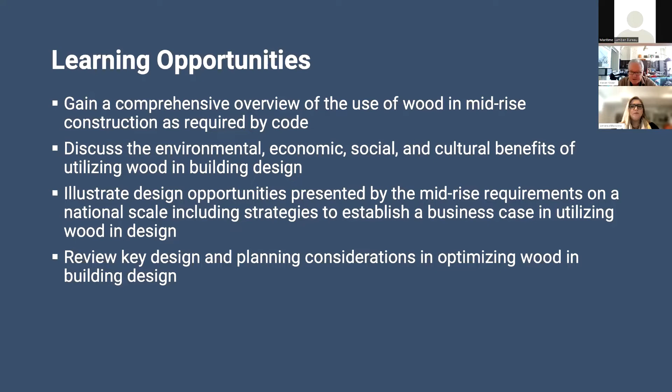So big question, why the mid-rise guide? The ensuing publication, which we drew all the research from, was really to concentrate on the code opportunities that the provisions across the country had left us with. It's been active for at least 12 years. The first province to adopt 6-story wood construction was British Columbia. And each of the provinces across the country were at different acceptances and understanding of what those code provisions gave us.

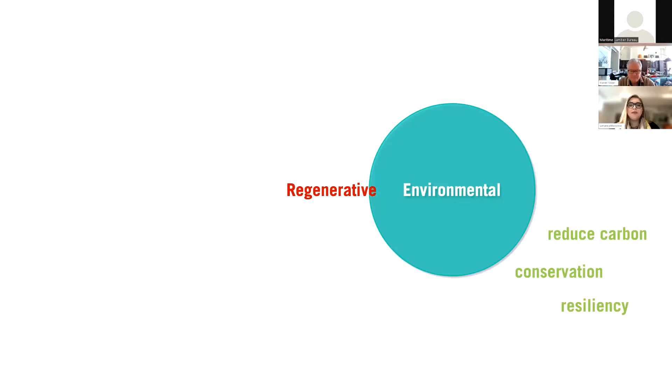So our strategies for building design over the coming years will have a critical impact on whether we can achieve climate stability, whether we can form stronger communities, and whether we can move towards an architecture that positively impacts our cultures and our social networks to create healthy and thriving communities. As we know, buildings have multifaceted impacts on the environmental, social, economic, and cultural systems. Thinking about mass timber and prefabricated systems, there are many opportunities that impact each of these four sectors.

We can consider resiliency and conservation in our buildings by reducing carbon. We can provide healthier communities that are dignified and equitable, but we can also develop new skills and employment opportunities and foster new industries to all really support thriving communities.

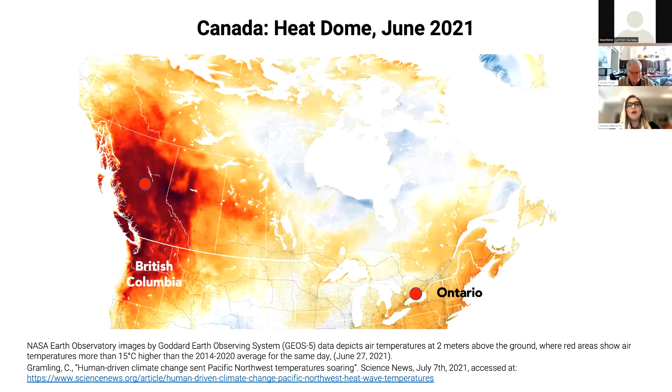So we come back to the environmental impacts, because I think this is where the increased use of mass timber and prefabricated systems can really have a great impact. And so, like many places around the world, Canada is seeing the direct impact of climate change. This is an image of the NASA Earth Observatory taken June of 2021, when British Columbia had this heat dome that covered the province, and it resulted in record-breaking temperatures and significant forest fires that summer.

And the impacts of climate change are presenting significant economic strain on our systems as a whole. The fires in British Columbia in 2021 resulted in over $881 million of damages and impacted over 4,000 homes. Months later, the extreme rainfall and flooding that was caused in British Columbia, mostly because of the soil that was unstable because of the forest fires, resulted in over 15,000 people having to evacuate their homes. And it impacted critical food sources, resulting in over $450 million of insured damages. And we saw weeks later that the maritime provinces also had extreme rainfall that same year.

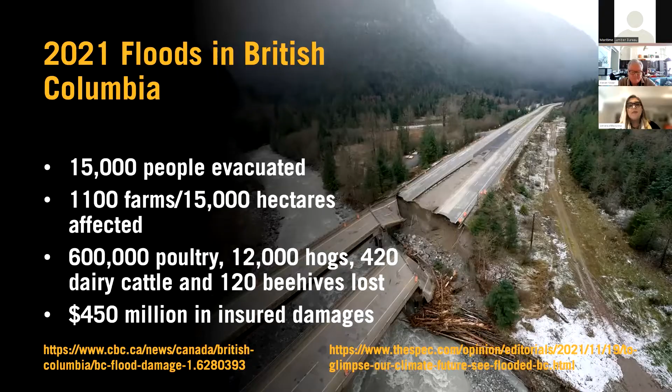Now, climate change is impacting our ecological systems as well, which is linked to the decline of biodiversity and pollinator animals. Biodiversity is critical in safeguarding global food security and underpinning healthy and nutritious diets in communities, and also improving rural livelihoods and resiliency of people and communities. A dramatic die-off of pollinator animals, which climate change is one of the key factors in, could result in the loss of essential crops of over $500 billion a year. So the economic impact of climate change, along with the social and cultural impacts, are great, and we must really be considering differences in how we proceed forward.

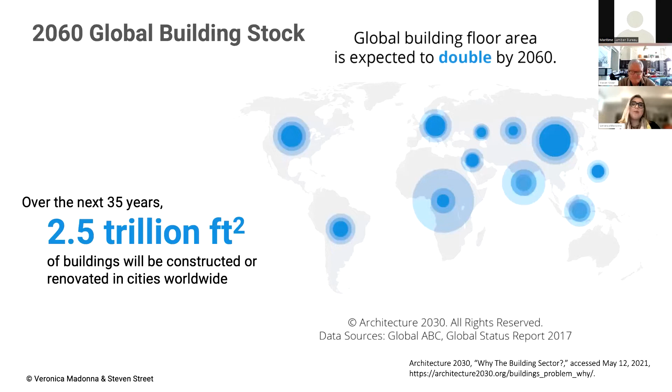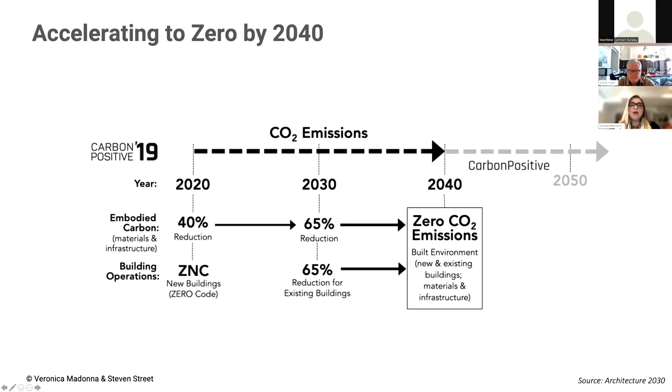We're seeing this in our own cities and towns in Canada as well. The Toronto City Council has just passed regulations to change its 2050 targets to 2040. By 2030, there's an urgency to develop net zero carbon standards. And also, you can see here from this chart the stepped system, where it's saying that new buildings should achieve net zero carbon as of today in terms of operation, and a 40% reduction in embodied carbon. And this is where mass timber can play a significant role. And by 2040, we are zero on every aspect, including existing buildings.

Now, an emerging area of study is embodied carbon and its impact, because embodied carbon locks carbon into place as soon as the building is built. There's no way to really improve that condition once the building is built. And that's why materials become a significant component of that. This was a study that I undertook with some colleagues at Athabasca University, where we studied the impact of carbon on both a code compliant building and a net zero carbon building. So we did a typical 5-story mid-rise office building, and we ran metrics for a code compliant one, thinking about operational and embodied carbon, and also one net zero.

What was interesting about the summaries that we concluded was that by simply changing certain things, like the way that we looked at our operational systems, and moving towards more passive design systems, we were able to reduce 48% of the operational carbon. Now, by simply switching the concrete reinforced structure, which you see typically in these types of buildings, to a mass timber structure, we were able to receive an 83% savings on embodied carbon. To me, that's very significant, because simple moves in considering our materials, and in particular our structural systems, can have significant impact on embodied carbon.

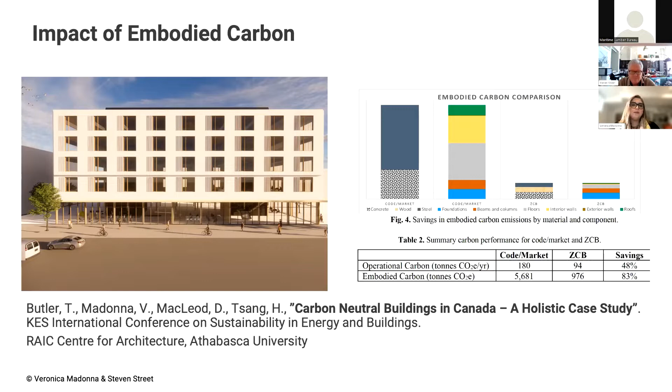As well, many planning and urban strategists are speaking of the importance of the missing middle. This is the community-driven, mixed use, mid-rise buildings that encourage livable and thriving cities.

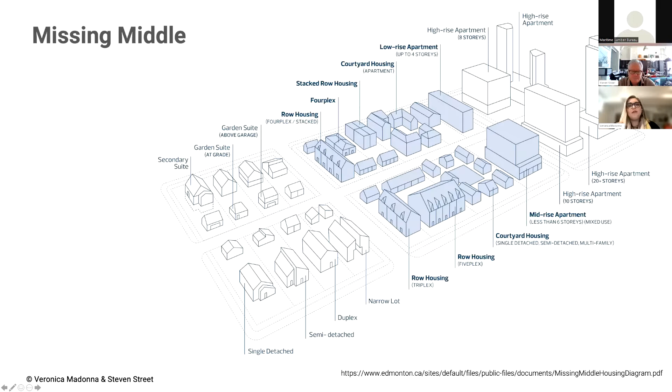At the same time, Canada, as many parts around the world, is faced with a housing crisis. Almost one-third of Canadian households live in inadequate, unaffordable, or unsuitable housing. Most vulnerable are women, youth, and visible minorities, as well as Indigenous communities. So the opportunities for mass timber and prefabrication to bring healthy, equitable, and durable housing into these communities is great, and we must look towards those systems as well.

There are strategic plans across the country really looking towards developing northern communities, as well as densifying existing main streets. This is something Steven talked a lot about when we were starting off the guide: the potential of mass timber to build on top of existing 2- to 3-story buildings, which we see across many towns across the country. The reason this becomes very fruitful is that mass timber is a very light system that could easily be placed on top and have minimal impact on existing buildings, not only keeping the existing housing stock, which reduces embodied carbon in itself, but also preserving the heritage of our cities and towns.

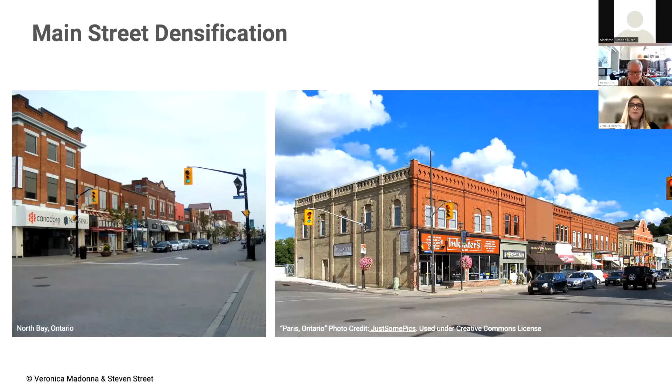It was just-in-time delivered. Once the foundation work was in place, it was craned in with a mobile crane from the rear laneway and erected up to the frontage. They started from the front of the building to the back, but it's a positive impact on the street — it stays within an allowable height and also has less impact.

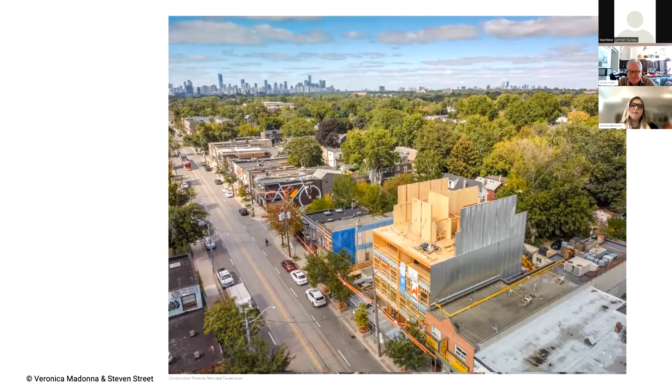Going to Sweden and seeing Canadian products being used in an application we can't actually do here was quite ironic. But the idea was these buildings were a mix of incomes — affordable housing units as well as privately owned. It's just something to think about, how planners can create these great little nodes of community.

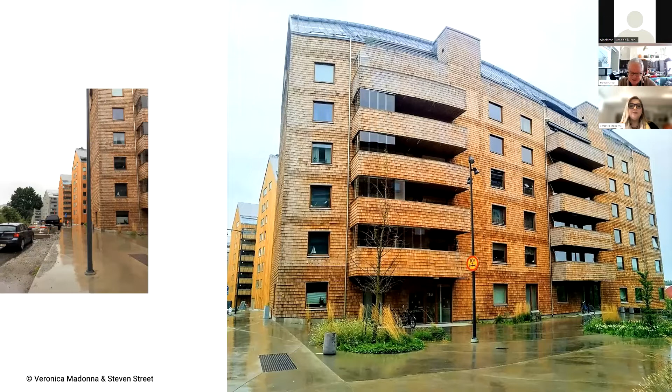Some more illustrations of what the Swedes have done very well: they took a brownfield part of Stockholm around the seaport district and went into this on a big scale. They wanted to get families back into the city centre, and you do that by encouraging really good, healthy, quality housing. What I liked as well was that on the flip side of the buildings there were community gardens and allotments where people were encouraged to grow their own food, and also on the street side of the development they had lovely gardens which people were encouraged to sit in 12 months a year.

They play hockey and ball and everything that we do here, with very narrow streets. They wanted to discourage as much street parking and automobile use as they possibly could, so they had a very narrow street, just 2 lanes. I remember the comment from the Canadian delegation I was with, that they'd never get their fire trucks down here in Canada.

The architect and planners taking us around the development looked at us and said, well, just tell them to get smaller fire trucks, which I thought was quite a comment. It's actually stuck in my brain ever since.

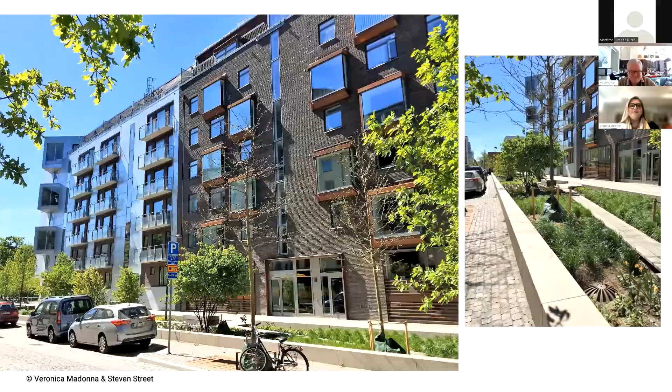So we're going to take you back to where the work started for Veronica and I when we got the privilege of doing this guide, about how project planning can be used to optimize the design of these buildings using the code opportunities.

I call this Veronica's brain, with Steven pushing and prodding. It turns out we're both big post-it note fans, our walls are covered in them, but this was a really good way of unlocking how an architect starts to think and needs to think about working with their clients to get the kind of building which they see as their vision, and an architect can help them achieve.

So it goes through some of the pre-planning considerations, understanding the code provisions. The key part of this is, how am I going to do this with the structure? Is it going to be an all wood structure? Is there going to be a hybrid structure? Is it going to be a podium, etc.? And some of the site-specific considerations an architect will go through mentally.

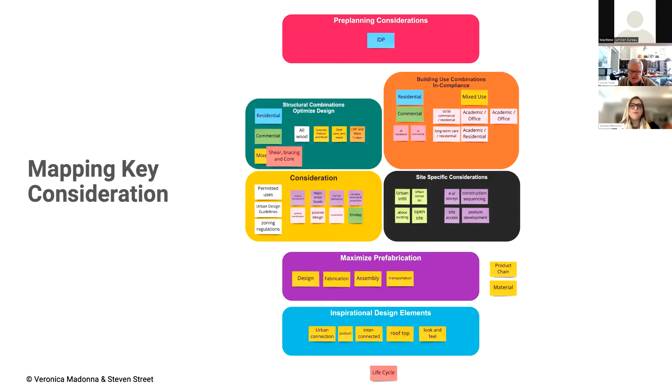I think this was really my eureka moment when I started to understand the sequencing that goes through an architect working with a client, and how they actually arrive at a decision on how the building and what kind of materials are going to be in the building form.

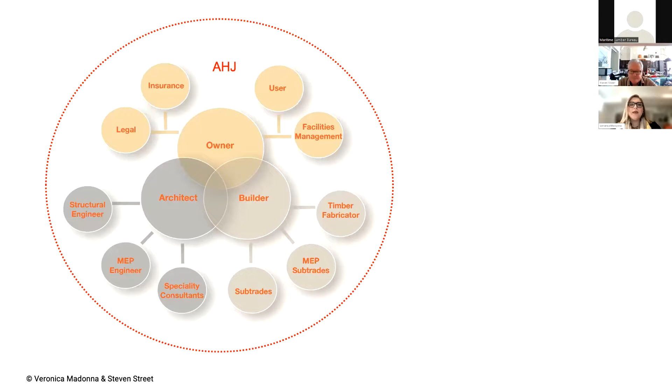Veronica, do you want to take this one? Sure. One of the things we talked a lot about and understood through experience is that we really can't do this alone. As architects, as owners, as developers, we need to come together as an integrated team and work upon each other's strengths and experiences to bring innovation in architecture.

So when we're thinking about the integrated team, we need to start thinking about this right at the planning stages. Ideally, this would be integrated into the client's RFP process so consultants can respond to it integratively. Having builders, constructors, and prefabricators of mass timber at the table can really lead to efficiency and economy of the system. Architects can speak to the program and planning needs of the building, and structural engineers will talk about efficient bay sizes, thinking about that early on to maximize the efficiency of mass timber in relationship to the program being designed.

The mechanical and electrical engineers need to be on board early so there's early integration of systems, because in mass timber everything is prefabricated right down to every penetration in every floor slab. You want enhanced integration of systems, there's no coring through that slab when you're on site, or ideally there isn't. Fabricators also bring their own knowledge of efficiencies of their products and sequencing of construction, leading to a more enhanced and more efficient design.

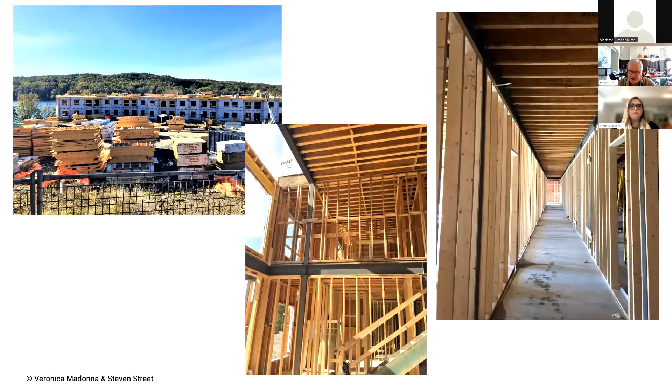The approach as well, from our research, was that you have to know your product chain and supply chain—where the products are going to come from—and make sure you can be as local as possible. If you are bringing product from far away, in this case mass timber, this is highly important and a critical path, because of what we've seen in the last 3 or 4 years with the amount of building and supply issues since COVID—hopefully we're through the worst of it now. It's important to get yourself in line, knowing if there's a 12-month wait, which sounds like a lot, but if you're into site plan approval, zoning amendments and stuff like that, you can get yourself ready to supply when the time comes for the build.

Light frame is something you need to consider as well. Most of the I-joist, engineered wood, and dimensional lumber companies that typically supply 2, 3, 4 story buildings also had supply issues—not as much as 12 months, but you need to get in line and know where your products are coming from. This is where Vinny and the program in the Maritimes can really help—they understand local supply chains, trade associations, etc. So a call, or better understanding of what's available locally, is a key thing you need to be doing very early in project development.

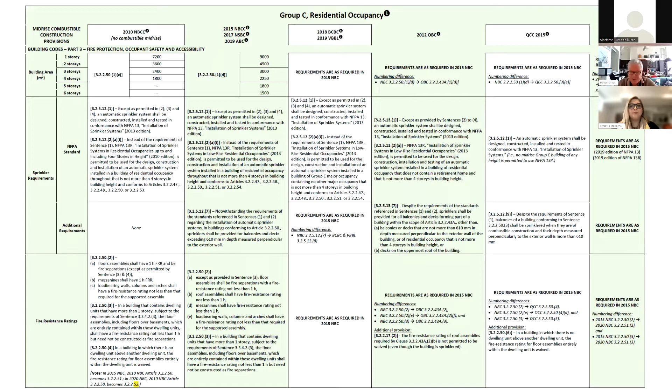Going a little closer to home, we've illustrated exactly what the requirements are—in this case, the National Building Code 2015. You can see that residential occupancy, for example, for 6 stories, can be 1,500 square meters. And it's interesting to note that if you flip to business and personal services, 6-story, you can do 3,000 square meters—double what residential allows for business and personal spaces.

So this is really interesting, especially when you start to mix up code provisions and assembly requirements when bringing other mixed major occupancies into the mix. What we try to do is illustrate the opportunities for different types of buildings depending on where it's being built inside the city. Next.

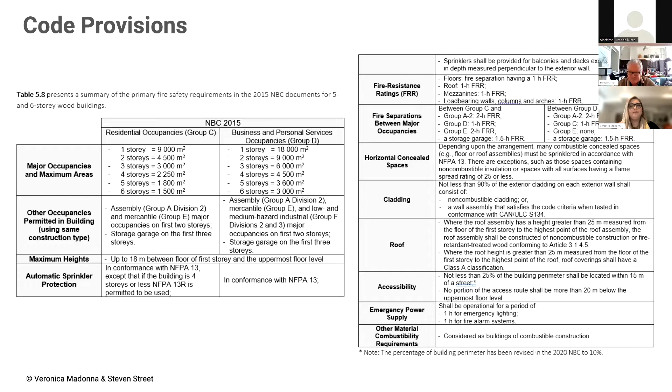And some illustrations here, which are included in the mid-rise guide about those types of areas. In this case, this is the 2012 OBC, which we use on a day-to-day basis, section 3.2.2.43a. Unfortunately, the numbering changes depending on where you are and what code you're using, but hopefully those matrices make it very, very clear, and we've illustrated nicely exactly what type of buildings are allowed.

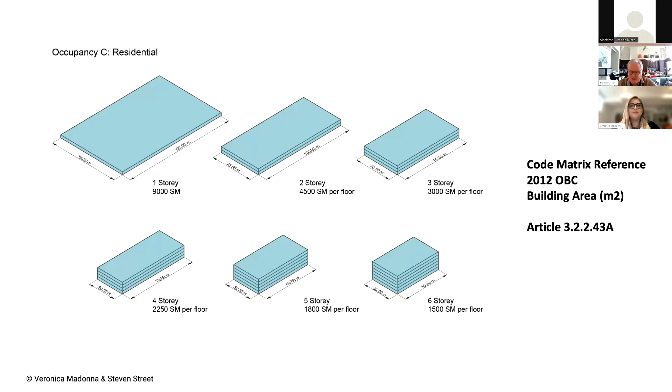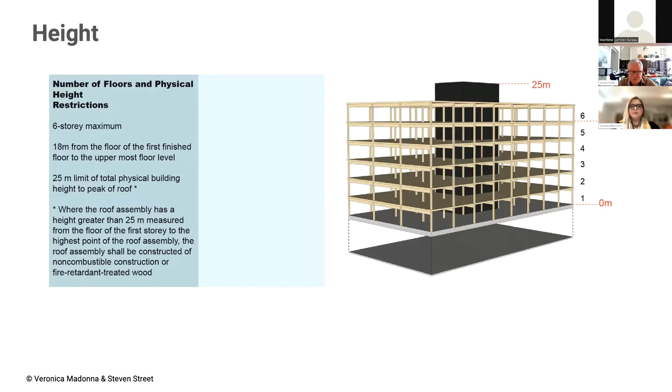We've seen a lot of this being used in Ontario, and we've seen a lot of 5-story buildings because of the extra ceiling heights that may be required or maybe part of the design process, that Veronica would be involved with.

Sure, thanks, Steven. One of the things that we really wanted to stress in this guide is that there was this kind of preconception in the industry that the mid-rise was only for Group C and Group D residential and personal business use. But really the guide, the code requirements and the changes in the code, allow for a lot of mixed use developments.

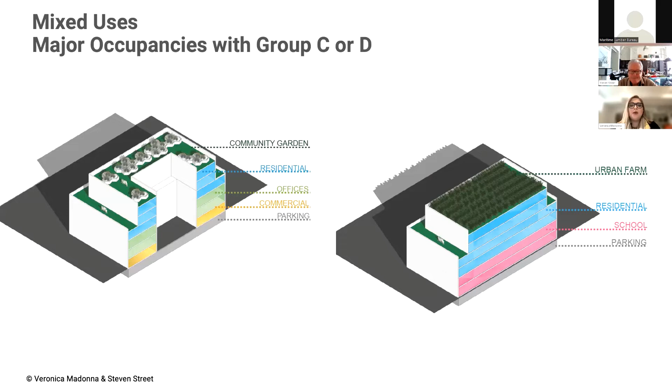And this is something that's really interesting because we're seeing it in different cities and towns across Canada, the integrated occupancy types. We're seeing schools integrated with residential mixed use buildings. We're seeing commercial, office, and residential all together where people can live and work in the same building. So what we've illustrated in the guide was the different opportunities involved, and also the specific requirements needed in order to mix the occupancies so that you can consider a daycare, a school, or commercial use on top of residential.

Even storage and garage uses above grade are possible as well. So what we tried to do in these diagrams is illustrate that chart that Steven had shown earlier in a visual way, because like many architects, we'd like to see pictures and then go back into the chart and dig into the information. So here we grouped things and tried to also capture every code across Canada so that you can find your relevant code and see what your specific requirements are.

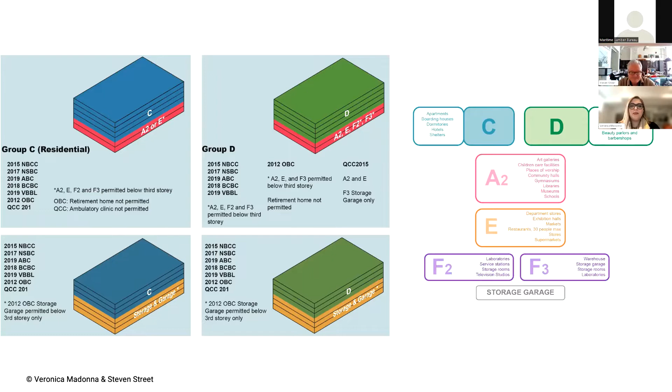Then you can dig deeper into the code knowing your starting point. These diagrams start to show very specific things like fire ratings and fire separations between the major occupancies. And really it's about coming back to that initial discussion about thriving communities, about the missing middle, and how the mid-rise requirements allowing for wood construction can really enhance that through the mixed occupancies and understanding the requirements of the code.

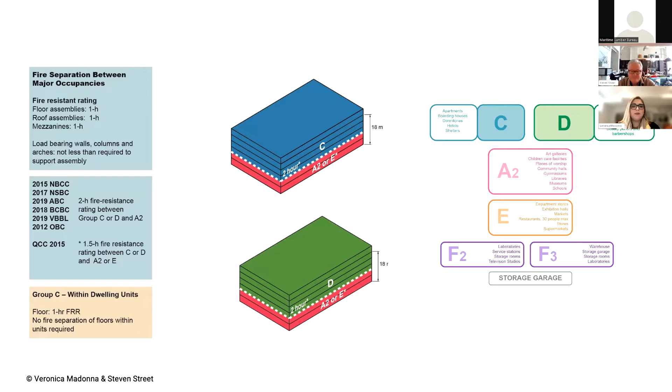This is an interesting project. This was the first development issued under the new code provisions in Ontario back in 2015. So the permit was issued, and this was for Templar Flats in Hamilton, on King William Street, a highly historical part of the core of Hamilton. It was a derelict site where the new build is placed in the center, but the two buildings either side had foundation issues because of fire damage caused when the building burned several years ago.

So part of the process was shoring up the existing buildings before the new build could take place. This was a really interesting way of saying, well, without destroying the actual visual of the area—obviously putting a new building back where there was a derelict space was a key part—but you wouldn't want to change the landscape too much by taking the 3 or 4 buildings out and putting something that doesn't exist or has no place in the architectural value of this complete part of the Hamilton core.

So they did a fantastic job illustrating how you could use these new code provisions in a very culturally and historically sensitive heritage area and actually optimize them. They did a 1-story concrete podium, which went down quite a way given all the shoring work needed on the foundation, and they were able to link the 2 buildings either side to it. The podium supports the wood portion above.

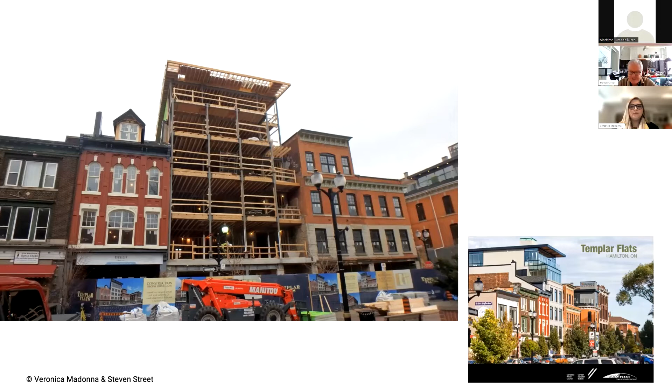Also, with our code not being completely harmonized across the country, there are non-combustible requirements in some of the code provisions. I don't think in the Maritime provinces you have this, but certainly in Ontario and Quebec, we have to have a 1.5 hour fire rating and non-combustible exit stair enclosure provisions, which are difficult to navigate but not insurmountable. You have to understand how the building's going to behave, because you have a very ductile system with the wood.

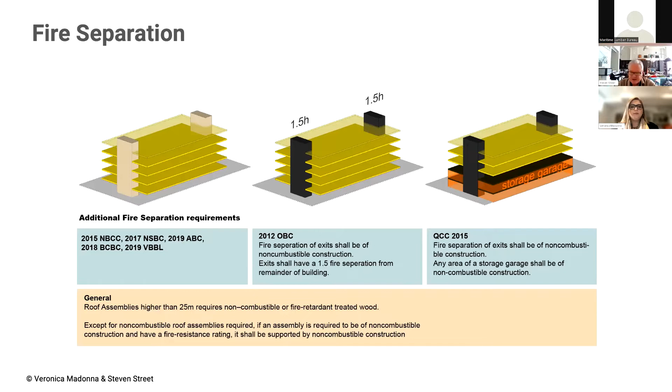And then you have a static core that doesn't move quite the same way, so detailing is critically important. We cover this extensively in section 5 of the guide, in the structural section, about making sure that you've detailed the plans properly and understand the vertical movement inside the building so that the detailing is done correctly.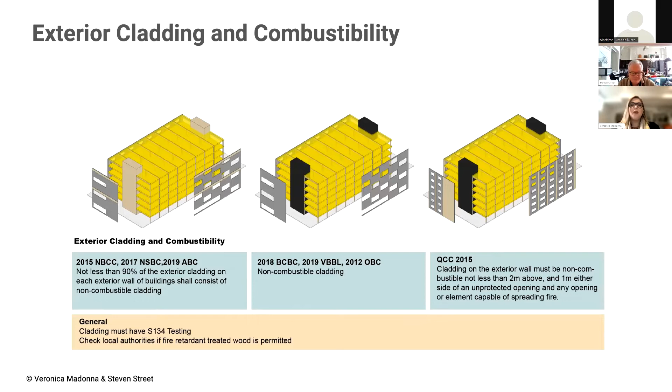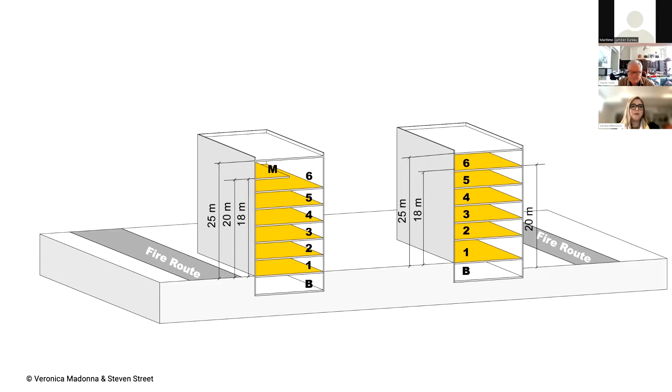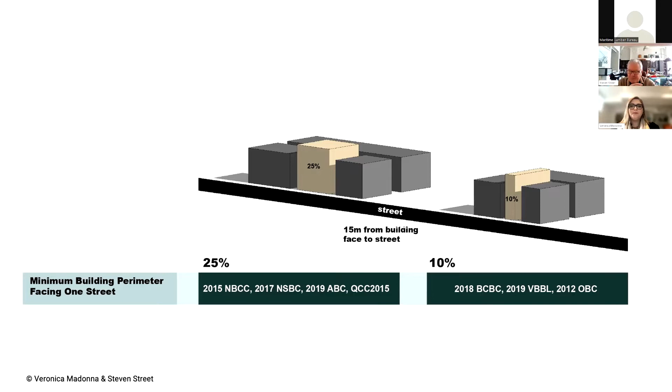This diagram also illustrates some changes across the country to adapt to different urban environments. The Vancouver and Ontario Building Codes have allowed for a reduced minimum building perimeter facing the street, mostly because of many of the narrow lots we see here in Toronto and in Vancouver. We actually wouldn't be able to do many of the mid-rise buildings if we had to maintain the 25% face exposure requirement, so there are slight differences there. This was important for the Templar Flats project as well, because it was a narrow abutting site, which is one of the reasons the code provisions were written with that 10% rule, because it was an infill site. I'm sure urban centers in the Maritime provinces also have these very skinny, derelict sites where you want to put something, so this allows that to happen.

So, do you want me to? Oh, go ahead, Steven. Yeah, go ahead.

I was just going to say, now we're going to start to review some of the strategies for project planning to optimize the design work.

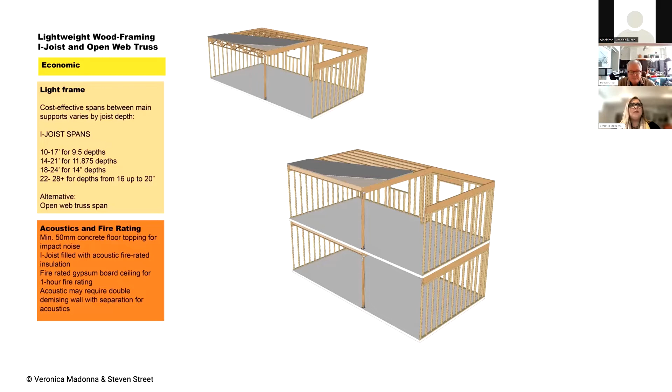These might all come into play around the insurance caveats that you're going to have to think about when you're planning and actually executing a project of this scale. Safety fencing might be a requirement actually in the insurance policies, and it should be. How are you going to manage people going onto the site when they shouldn't be there, some kind of site security, etc., when the trades come onto the site.

But also the expedited building is obviously the key to the success of this. You want to get the occupants in as early as possible, and this is big for developers to think about. I've got carrying costs for financing, etc. I want to get that building occupied, so the money's flowing.

So big considerations. This was done actually in a prefab wall fashion, and they actually prefabricated the floor systems as well. Probably 8 to 10 feet for the floor slabs, about 30 feet, 40 feet long. So you can imagine, 400 square feet per crane pick to put the floors down. And then they were just followed by the tower crane itself, moving around and actually putting the prefabricated walls.

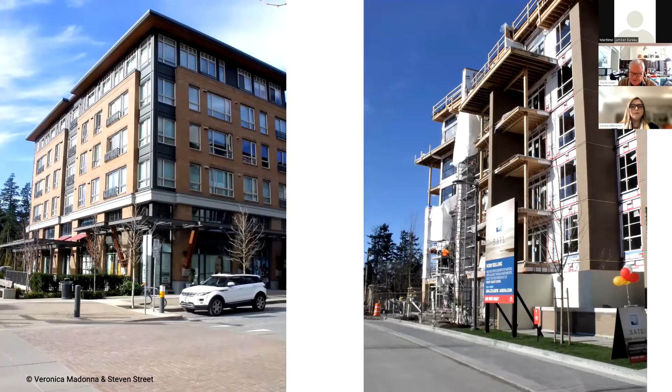Next. And taking this further, getting into some mixed use occupancy buildings. These have commercial space, retail space, shops, restaurants, gallery space, etc. On the street level, concrete podium with the wood above. So again, the illustration of those code provisions and what you're allowed to do are really important when you start to plan out these types of subdivisions and community spaces. Next.

And it's a great way to incorporate prefabrication of both the lightweight system as well as the mass timber coming to site, and taking advantage of some of the longer spans that the cross-laminated timber will give you in terms of the floor spanning.

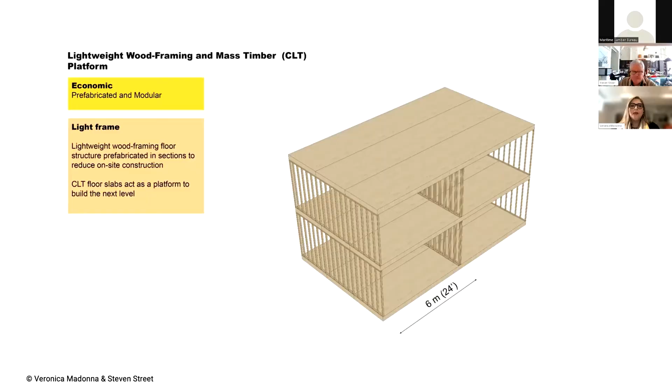We've had many illustrations of this approach in building mid-rise. If you can think about it, if you've got an 8-foot wide slab by 40 feet long, you can imagine how many crane picks that is to actually put a floor deck on. It greatly reduces the amount of crane work and expedites the platform framing part of this to get up and start to build or install the prefabricated walls. So again, there are ways to really expedite that, and we hope we've illustrated that very clearly inside the guide. Next.

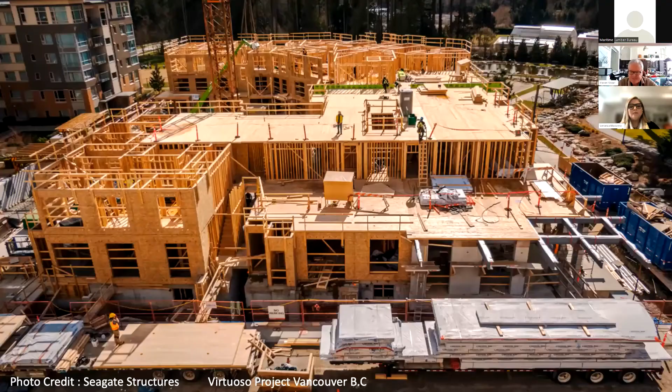And you can see here the scale of the build. This isn't a particularly easy building with the angles, and you can see the size and the scope of this. But again, this is a great illustration of the just-in-time delivery. The trucks roll up, they unhitch, they take the trailer back that's been unloaded to the plant. In the lower right corner there is the truck with the next panels for the floor slabs. I'm assuming they will go on to the back there where the framing's already done. So you can see again, scheduling is critically important to make sure you're expediting the build process. Next.

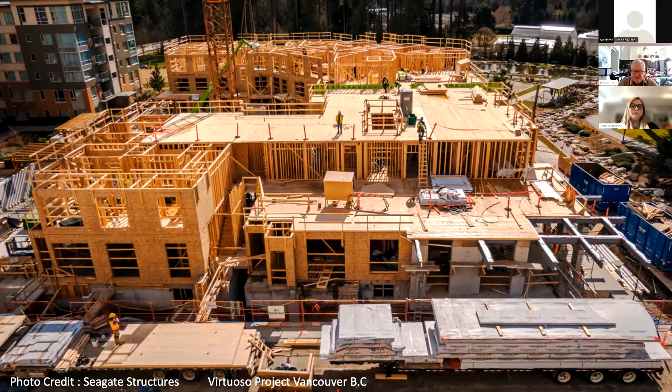In the guide, we also illustrate a number of mass timber systems. And what was interesting to me is when we started the guide, I reached out to Robert Jackson from Fast + Epp, and we talked a little bit about the economics of the system and the grid. And really it was about maximizing the efficiency of the wood structure. And what he found in his experience is that a 9 meter by 9 meter mass timber structural grid is a very economic and efficient system. However, one of the challenges you're going to face is that it's going to have a very deep structural depth to the beam members.

And so, when you're considering your structure in terms of economics and spans, again, as I mentioned before, you want to be careful in terms of your depth structures right up front, because there might be a possibility where you're not going to be able to get 6 stories in the 18 meters if you're using a very deep structural system, depending on your floor-to-floor heights.

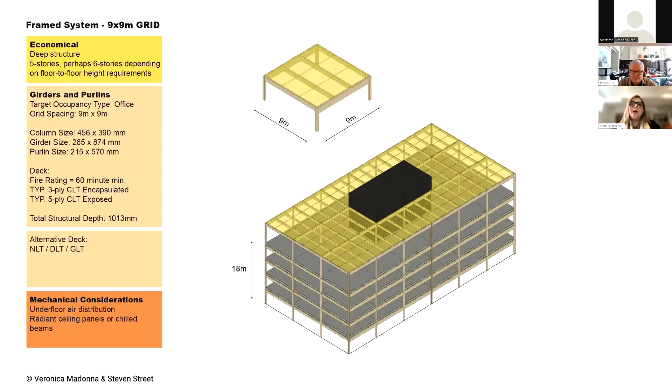So, as I mentioned, in each of these diagrams we talk a little bit about the advantages and disadvantages. This one here is a really interesting system. It's being used in a lot of office building designs. But one of the key considerations is that with the deep purlin and girder system, you need to have a strategy for running your mechanical system. And so what we're seeing a lot with these types of structure is underfloor, raised floor access, mechanical distribution to avoid running the mechanical system above.

I think that was good, Veronica, when we were chatting about that one as well, about how you need to have that decision made quite early about the structural system, because it's the aesthetics as well; that particular system is actually creating the space inside the structure. And from an architect's point of view, you don't want ductwork looping underneath the beams to take away from the magnificence of the structural system that's being used there. So again, that discussion very early on about the raised floor, running the mechanicals through that, was really important in the success of this.

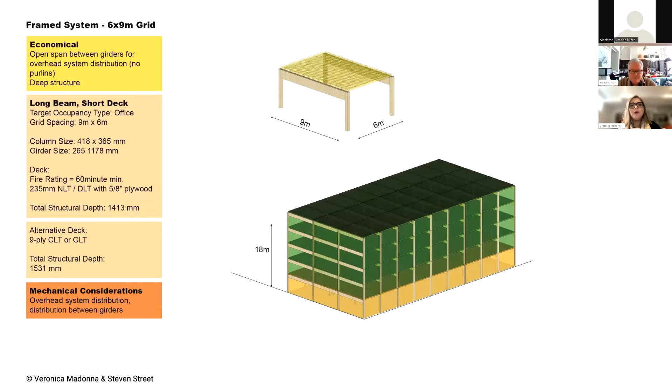Yeah. This one here is an interesting system. It's a 9 meter by 6 meters. So what it does is it has very deep girders on the side of the bay, but it has one side open so that you can run your mechanical systems overhead, and you're spanning a laminated timber floor deck from girder to girder. And so we're seeing a lot of this also in office buildings.

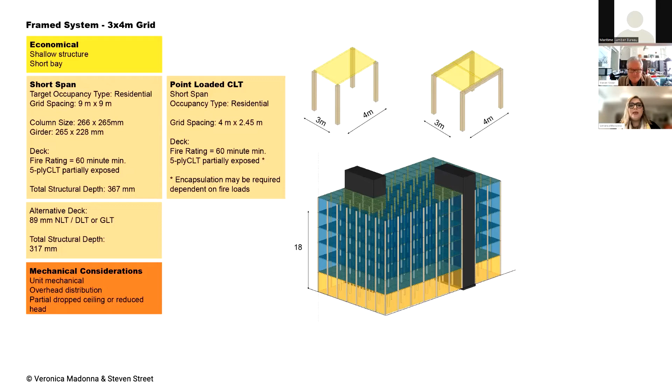This one here is a 3x4 grid. You might see this a lot in higher density residential projects. It was a similar system used for the Brock Commons Tallwood House student residence. This one here, you have your glulam posts and then a cross laminated timber deck that spans directly, point loaded on the column. And so you're going to get smaller modules, 3x4, but again, it might be very appropriate for student residence type buildings. Brock Commons was an 18-story building, so it was in the tall category, one of the tallest buildings in the world for a long time.

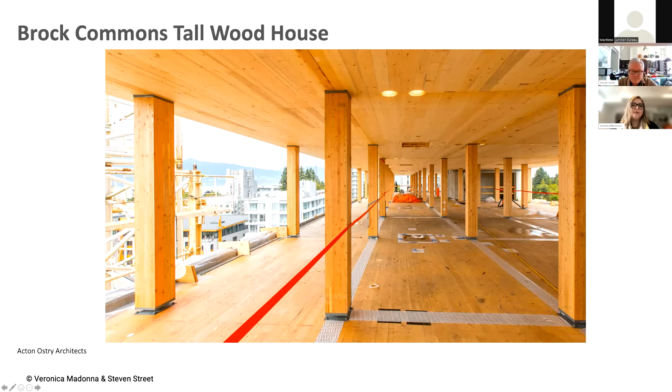Thinking about things happening in the industry, this is where Stephen and I see a lot of movement in the next couple of years: hybrid systems, using mass timber and gaining efficiencies by coupling it with concrete or steel. In this system, a thin wood-concrete composite sits on top of the cross-laminated timber to help with shear forces when you're trying to achieve very long spans with a shallow structure. You might see this implemented in urban areas where you have maximum heights and density issues you want to maximize.

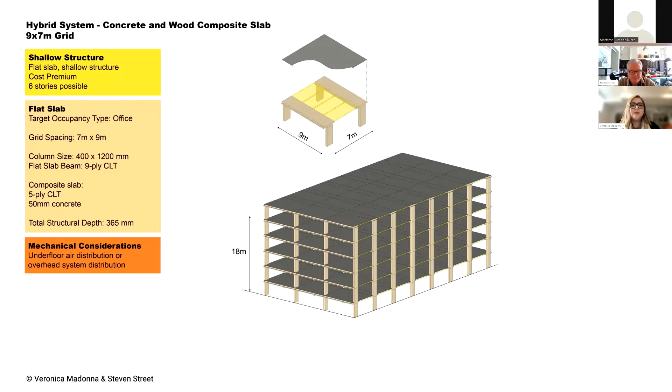This is the system used at the Arbour, now called Limberlost Place at George Brown College, where the composite concrete slab was placed simply on top of the CLT slab bands, which are the beams that come across, giving them that extra shear support so the fibers of the wood don't split apart.

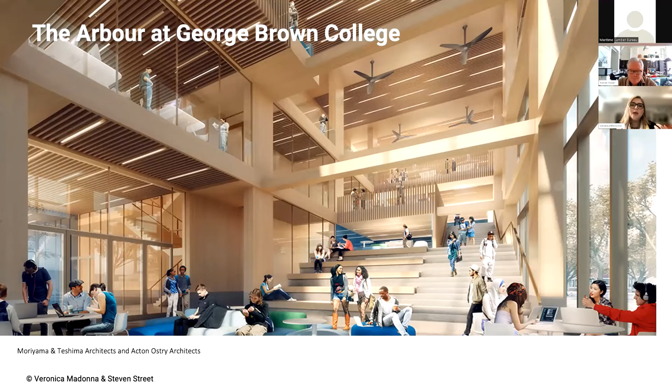Everywhere else, a thinner concrete topping was applied for acoustic purposes. That's another consideration: what are your acoustic ratings from floor to floor, and how are your systems going to accommodate that? Because wood is a light system, so it transmits sound more easily. You want to account for that early on in your detailing.

Good point, I saw a question come in about that. There are some really great products, and also a lot of research has been done in this area to mitigate vibration and sound transmission considerations.

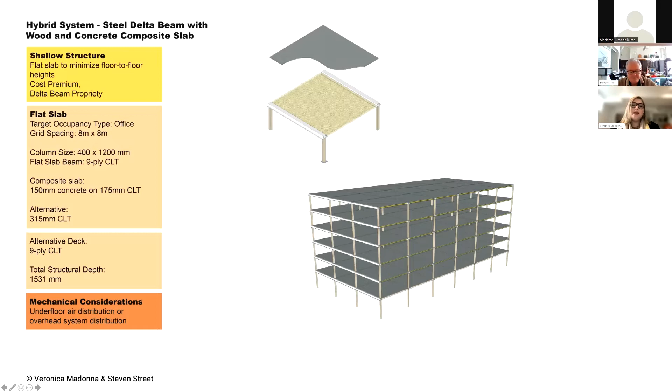This one also was a very interesting system using a steel delta beam, a proprietary beam, but you can think of it like any kind of steel beam coming across, where you then place a cross-laminated timber or even nail-laminated timber deck across, with a thin concrete slab above. This was the system implemented for the design of 77 Wade.

Stephen, did you want to talk a little bit about this? Yeah, this was one of the projects that's actually been put on hold for various reasons through COVID and office space, etc. But this does have permits granted, and hopefully it'll get going soon.

The idea here was to maximize that 8 meter by 8 meter grid that the client wanted. They didn't want bulkheads, they didn't want the beam scenario which Veronica illustrated a little bit earlier. They wanted a flat ceiling design, so the incorporation of a delta beam supported a nail-laminated timber deck. This is going to be a spectacular building once the time's right and everything aligns so it can get going.

In the permit process, getting back to the earlier point about the value of the correct team and outreach, the authorities having jurisdiction sometimes need to be around the table. They need to understand what you're trying to do and how you're accommodating fire rating requirements. This blew through the mid-rise provisions of the building code.

We were into alternative solutions for this particular project because it was 8 stories. So it's a question of having initial meetings with the city, the client, the architect, the structural engineer, the fire code consultant, etc., and saying, this is how we're going to achieve that fire rating, this is the system we want to use.

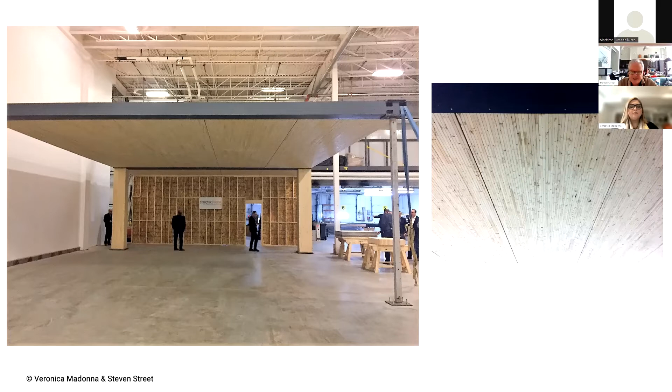Coming back to some of the initial conversations of the presentation where we're adding stories to existing buildings, I think this is really one of the biggest potentials we're going to see over the next coming years, where maintaining an existing building and being able to densify and build on top of that to provide more housing and more livable community type spaces is really important.

One of the most sustainable things we can do is not put all the buildings we currently have into the waste system, and instead utilize the embodied carbon that's already been placed into those buildings. But there come a lot of challenges with topping up these buildings, in that we want to consider the existing structural system. Wood is a very lightweight system, and it has a lot of strength compared to its weight.

So what we're seeing here is that using wood and prefabricated elements of wood in building on top has a lot of benefits. There have been a lot of case studies where the reinforcement of the existing structure was minimal, if not none, just spanning from structural point to structural point.

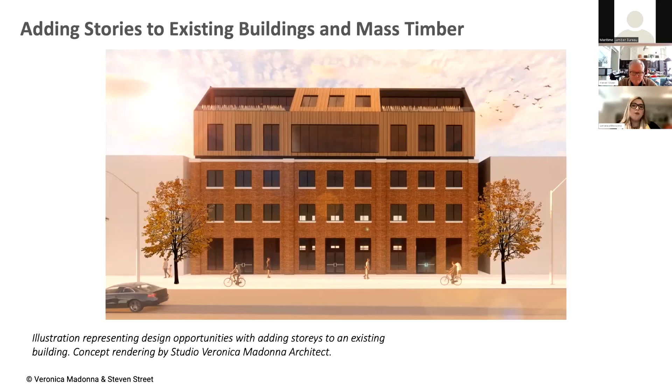The other advantage to thinking about wood in terms of densifying our building stock is the prefabricated element of a system like mass timber, as well as a lot of lightweight frame construction, has minimal disruptions to the site around it. You can imagine the products will be made off-site, coming in with just-in-time delivery, craned into place. That minimizes disruption to the community, minimizes noise, dust, and disruption in local communities, but it also minimizes risk to the existing building, where you can keep the roof on as long as possible and just open it up when it's time to make that connection, if you even need to do that. So there's a lot of advantages to considering prefabricated wood structures on top of existing buildings.

Next, we wanted to provide in the case study itself a couple of illustrations of successful projects. This is a 4-story supportive housing project done in Kitchener-Waterloo, utilizing cross-laminated timber really to the full extent of the expedited construction process.

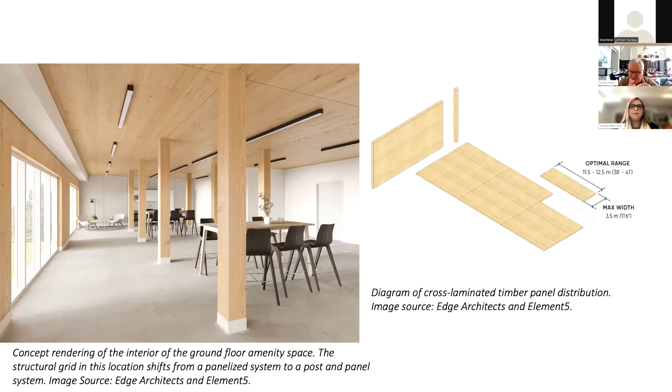As Veronica's mentioned a couple of times, these are light systems, so they were able to just use a mobile crane as well. This is where the GCs, getting them involved very early in the process, can talk about costing from the buildability point of view.

A great illustration of how the building was going to get put together, starting with the site work, foundation work, and then the superstructure. You can see the mobile crane, the just-in-time delivery, everything being placed into place, the envelope work starting for completion of the building. I can attest that this was such a great success.

The tenants were in the occupied space 2 months ago, a month and a half ago. I was by the site yesterday and they're actually starting the second building. The proof's in the pudding. They've made a big fan out of Melloul-Blamey, and they'll start using this on their projects to come.

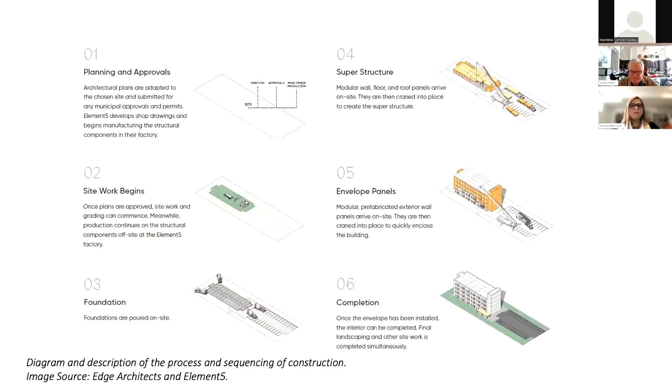Part of our work, Veronica and I got to tour the building when it was under construction. It's amazing—you have a theoretical way of thinking about how buildings get erected. We always say it's just a giant Lego set. It's all about the planning and the work beforehand. The erection process should just be standing walls up, putting the platform frames, and then going up very efficiently. But when you actually see it happening just as the illustration showed, it's brilliant.

The trucks rolled into the site, so there was no blocking of the street. The mobile cranes were in place, and everything was taken off the flatbeds and put into position.

What was uncanny—although the facades weren't on the building yet, when we were there they were putting the 3rd story platforms in place, erecting the 4th story walls. The roof slabs were just arriving. You could see window cutouts, and the guys on the back of the truck were already starting to put the services through the building. So the pre-planning, making sure you know where the mechanical layouts are, is all part of the early planning stage.

Although the sides weren't on the building, there was no concrete curing—it was a very dry site. That was uncanny; you could feel how different this was with this type of construction practice.

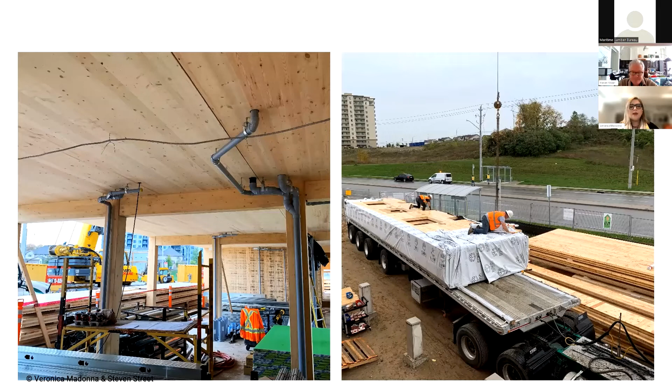And the full height facade panels too that you saw on the back of the truck there. So once we were there and the roof slabs had gone on to create the roof deck, the next thing was they just came along with the crane, picked it off, and then just started vertically laying out the facade panels. Incredibly quick too, because obviously the windows were already cut out in the factory using the CNC technology.

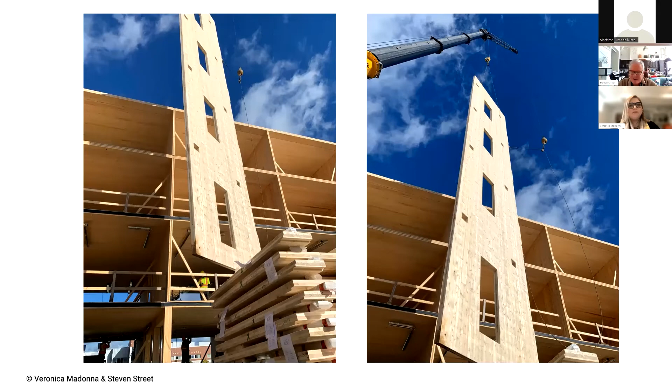It was just a brilliant illustration of what can be done with the right kind of planning in place. So next, give you an idea of what the building looked like once the shell was in place. And I think the next slide, there is a video.

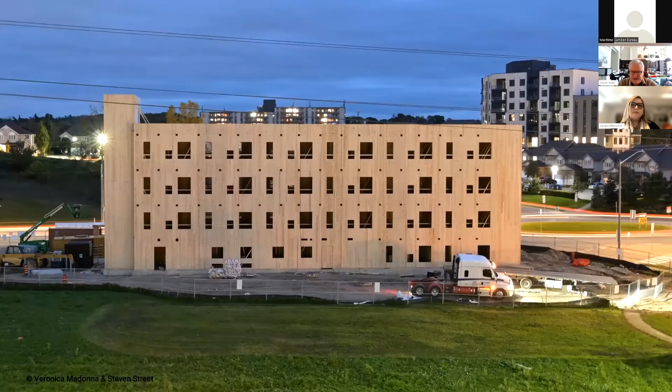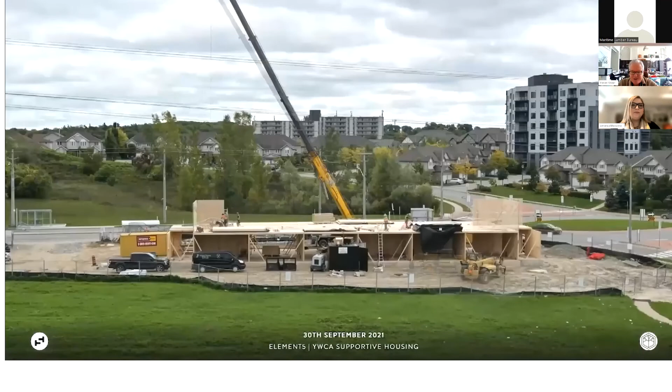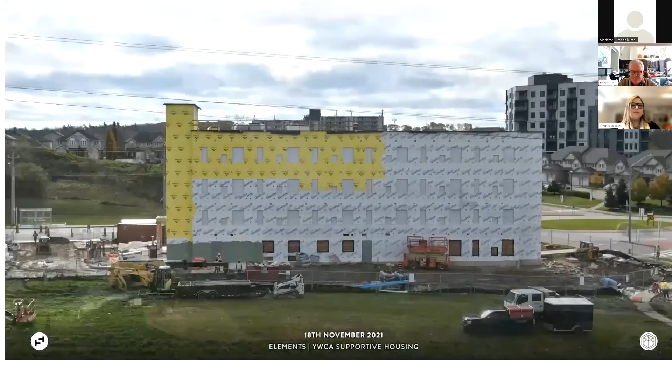So this was starting in September 1st, with the slabs in place, up to towards the end of September when they started to do the ground floor walls. And by early November, they were already putting the facades on the building itself, just in time for our first snow, which we had very late November last year. So great testament—like I said, I was there yesterday. It's fully occupied, and they're actually digging just to the left, the second site, which is going to be a 3-story, 2-bedroom version of this.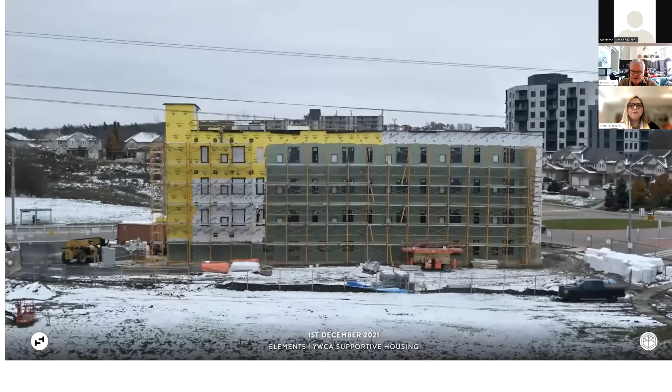So when we sort of turn our interest into supportive housing, affordable housing, and getting buildings up, which we desperately need, this may be that solution, which local communities and community services, social services need to be looking at.

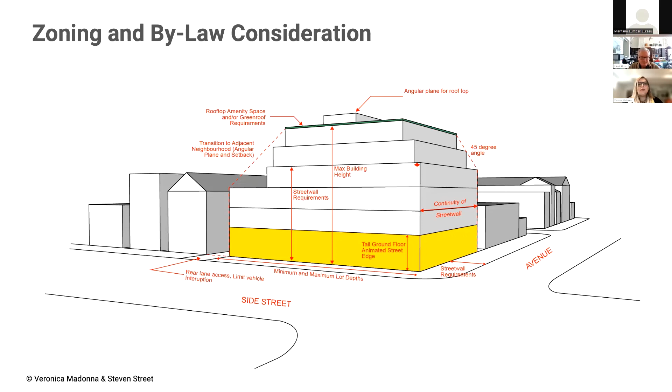And so you want to consider how you do that step back and the load on your structural system, load on the mass timber system or light frame wood construction system, and think about these things early, at the same time that you're thinking about choosing your structural system, looking at your integration of mechanical and electrical systems as well. Really just to optimize the design and optimize the systems.

So just to wrap up and bring us up towards the end now. What we tried to do—it was a terrible time to do anything around a business case about any building. We saw an elevation of supply chain issues throughout COVID, the wackiness of not being able to get windows and doors at the right time for buildings. I've had cases where people are now building—there's a 10-story mass timber building going up in Toronto currently, and actually they purchased the windows and doors, I think, a year and a half ago, and been storing them in the basement for the build.

But a big part of what we had to do was come up with something that's going to be time relevant. So whether we're looking at it now or whether we're looking at it in 5 years' time, there needs to be some relevance in it. So we tried to explore the value proposition of wood construction.

And a big part of that is the expected population growth in our urban centres. I'm sure this is happening in your regions too. There's people coming in, people need to have affordable housing that's good housing, and it's going to have longevity. So this potentially is a great fit for this.

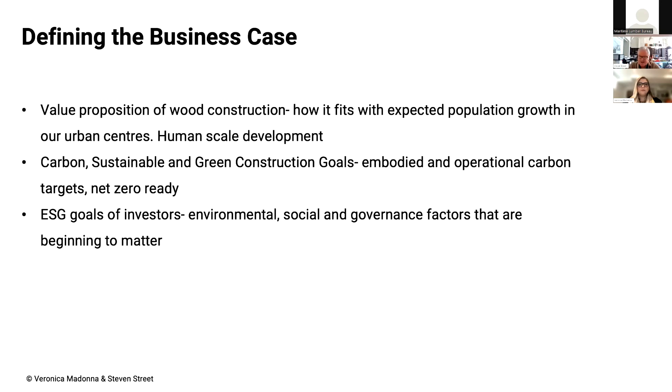And something that's coming up very much is the environmental, social, governance factors—the ESG goals. You go on Bloomberg, everyone's talking about this. This is where investors, whether it's REITs or private investment in buildings, they're looking at how that building is going to fit within the social and governance factors. People want to invest their money in the proper places. So we do touch on that in the guide.

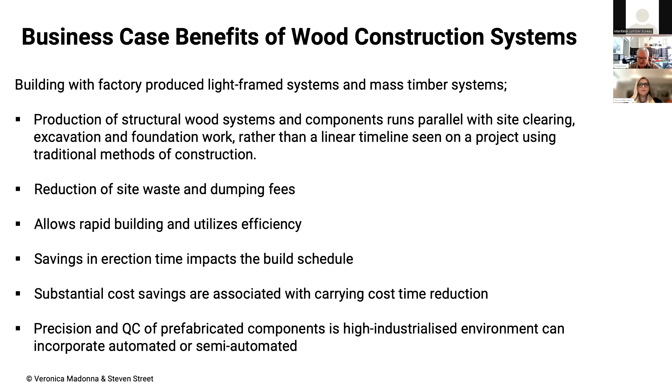I'm sure this is happening everywhere - dumping fees are escalating. You want to reduce as much on-site waste as possible. Having a system that's already built and delivered to site - there could be everything from closed panels to modular to open panel work, which many of the truss fabricators are able to do. It creates rapid building and gets the efficiencies going, but you have to put your homework in at the beginning. The building schedule, and reduction of that erection time, has a huge consequence on the success of the business case. There's a massive saving there, but you have to understand all the parts. I think we've highlighted it very well in the guide.

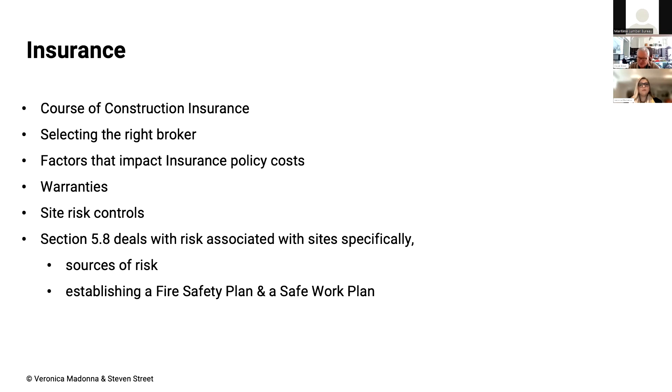Section 5.8 inside the guide specifically deals with site conditions, risks that you may be coming up against on the construction site, and establishing a fire safety plan and a safe work plan. There's a whole heap of information, resources and references that you can go to find out how this can be done. We've illustrated enough in the guide itself, but if you need more information, please feel free to reach out. So, the technical section overview.

Some of the work we deal with is really about how you actually design the building from an engineering and fire safety point of view. I always say the biggest thing is communication between the professionals, making sure that you stitch teams together. This is not just the client with the architect - this is the architect, the structural engineer, the fire code consultant. Everyone needs to be around the table. We've got some great illustrations on how that can be done.

You've got to be thinking about the structural design. Veronica may have an image of a building in her head - she needs to have a team from the structural engineering perspective that can actually deliver that. So we talk about the importance of the layouts of the units, the grid spacing when it comes to office buildings. If you're bringing in mixed occupancy caveats as well, you can understand how it's transferred down through the building.

Mechanical systems, you know, one of the areas that I don't think there was enough focus on. You have to understand how the building's going to breathe and behave once the systems are all in place. So again, getting back to how I'm going to lay this out, where's the ductwork going to be going? How is it going to breathe once it's occupied?

And this all bears down with the architectural considerations, the load-bearing wall placement, the openings, the acoustics, and whether that can be delivered using off-site prefabrication and the proper planning. So next.

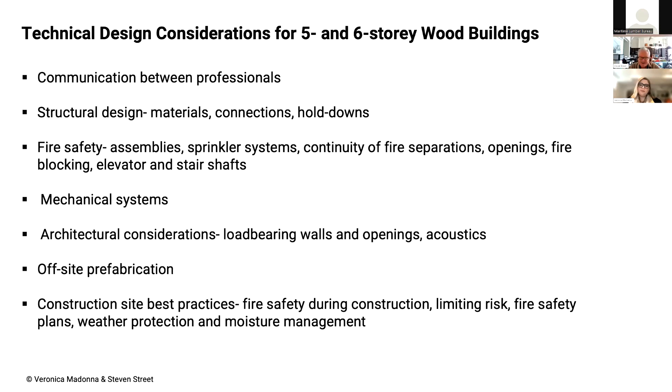So the structural design section as well, we brought in the National Building Code 2020 provisions. So it's as up to date as we possibly could have had it. Obviously, there's always a line which we have to draw and say, okay, that's it, we have to go to print now. But the idea, again, this illustration is from the Cecobois project, which we then used and updated. But again, it's that alignment of the shear walls through the structure, making sure there's great alignment within a residential building or an office building to transfer the load through. Next.

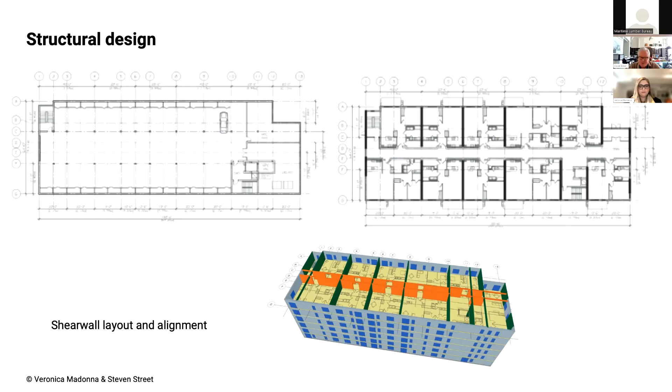So getting back to some of the issues with wood buildings, depending on what your structural system is, the shrinkage calculation that a structural engineer that's well versed in wood construction and wood design will bring in was the shrinkage factor. So understanding exactly how the structural system itself is going to transfer the gravity loads and the operational loads throughout the building. And we give some really good illustrations in tables about the types of construction materials you're going to use, what the moisture content is, how that's going to affect the building once it's in situ and it develops the moisture content, which is typically about 6%.

We don't want dry buildings because everything's going to crack. So majority of buildings, there is moisture in them, which is about 6%. So you've got to understand the moisture content of the materials when they're delivered to the site after manufacturing, how they're going to take on the site conditions, etc., and protection of that throughout. Next.

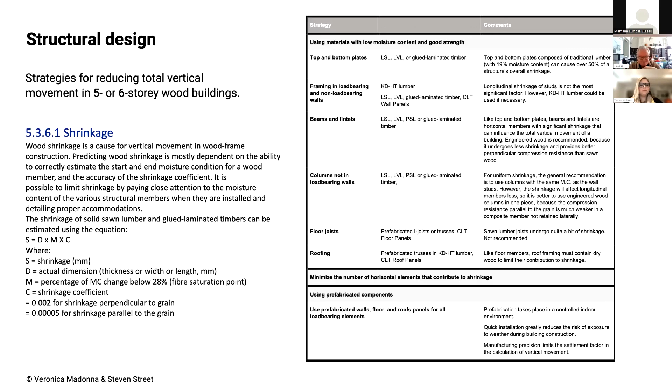We talk about some of the connections that you're going to see with higher wood buildings. Some of the conventional ways of tying walls and floors together through a 4-story don't have the capacity when you're into 5- and 6-story buildings. So you've got tie rod systems. So we extensively go through with Robert Koch, who drew up the structural section as well.

Placement, you can see on the left there, this is a tie rod system, obviously showing the tension and compression which you might see inside a wood building because it's ductile, but also the location of that in a concrete slab. So again, you've got to know how you're going to construct the building because these can't be put in after. So placement of this and the locations are critically important at the beginning. And we talk about how the panels themselves, whether it's light framing materials or CLT systems, are actually connected. Next.

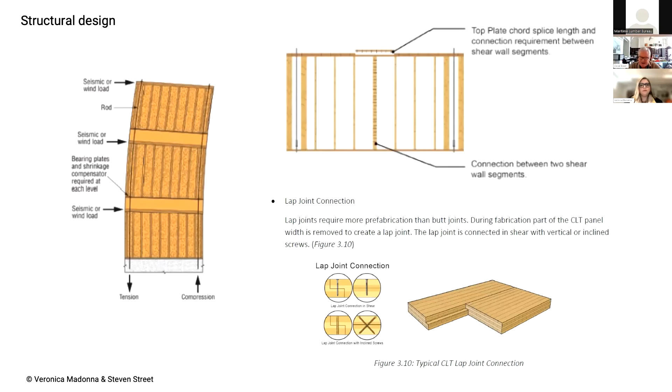So the continuity of those fire separations are critical in the building operation. You don't want partition walls to interfere with the gypsum wallboard assemblies that may be on the floor systems, etc., to create that 1-hour fire separation. So lots of really interesting work in the guide for that. Next.

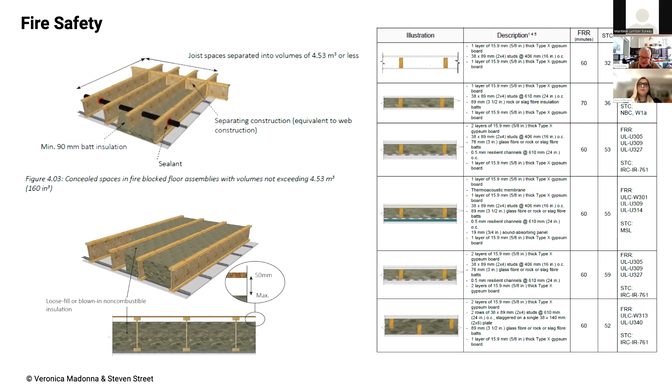I like to think that we've covered quite comprehensively low carbon construction, affordable housing and the need for it, prefabrication and modular construction, the use of mass timber, and the use of hybrid construction, where we're mixing concrete, steel and wood together for the future of our buildings.

So that was a great little thing that we saw, Veronica, right? With knowing that we were on the right path for everything. Things that were affecting certainly clients and their design teams, the influence of architecture, structural engineering as well, to make those 5 things a reality.